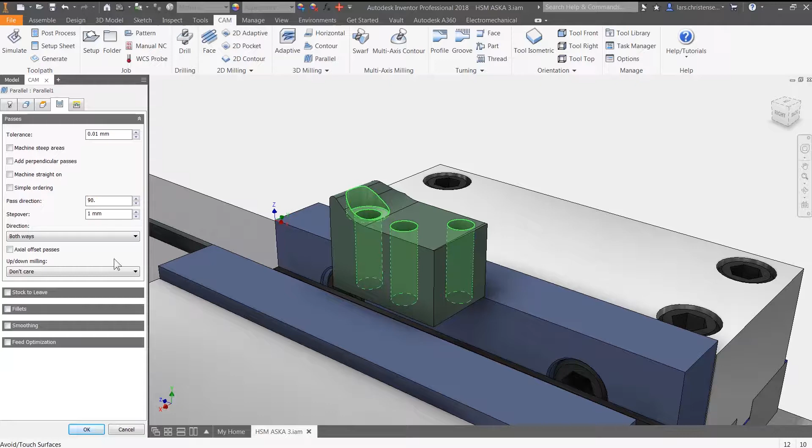Whether you're a CNC programmer looking to see what integrated CAM can offer someone with your experience, or a designer or engineer searching for your complete machining solution, as an Inventor user, you all have one thing in common: you want a professional CAM solution providing you with all the tools you need to work the way you work.

With Inventor HSM, CNC programmers get all the features and flexibility they expect, from toolpath creation to post-processing. Inventor HSM allows Inventor users to create toolpaths for all their 3 and 3+2 work with powerful technology such as 3D adaptive and the industry's most complete package of finishing toolpaths.

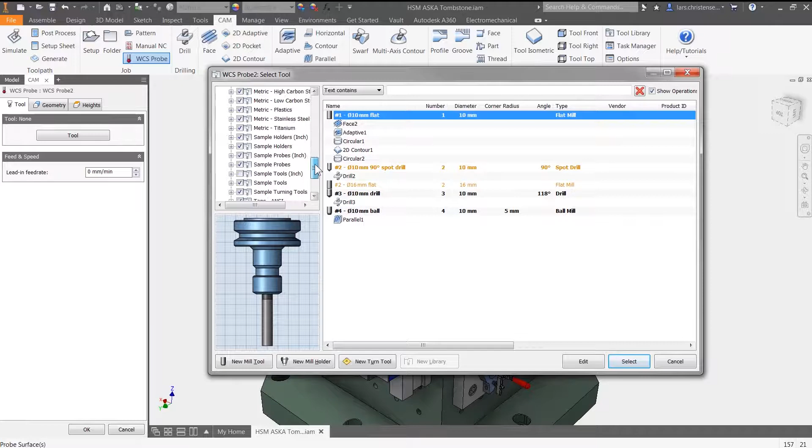Power users will be happy to know that HSM supports rest machining, user customizable tool libraries, and lets you create unlimited machining templates. Bottom line, Inventor HSM lets you manufacture the highest quality of parts in the shortest time possible.

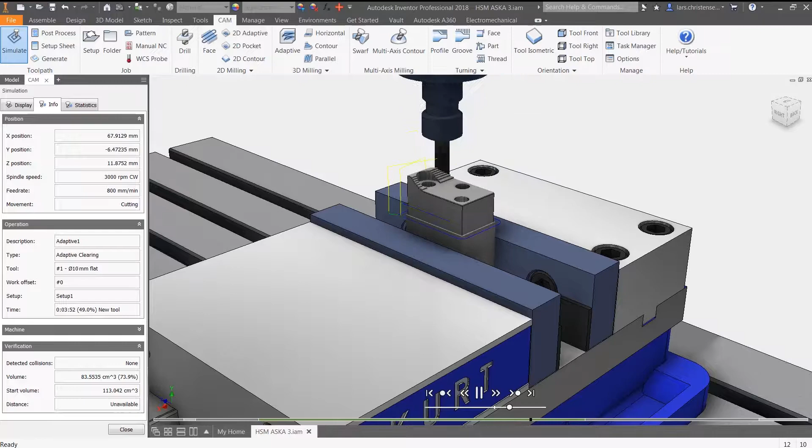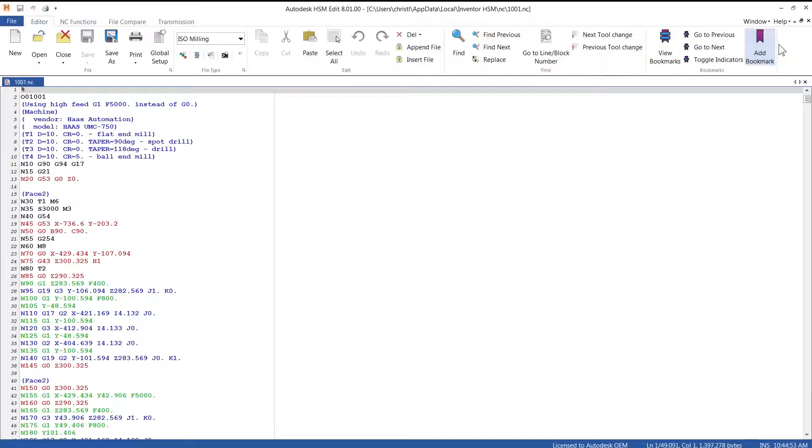Inventor HSM includes a powerful and dynamic toolpath simulation so users can see what they'll be machining long before they post their files. Speaking of posts, Inventor HSM includes a post-processing system including a full library of editable post-processors for the industry's most popular machines.

Inventor HSM also allows you to create graphical HTML setup sheets, including tooling data and toolpath statistics that helps machinists during the setup and machining process.

While CNC programmers appreciate the power and flexibility of Inventor HSM, designers and engineers appreciate the integration, especially the seamless workflow between design and toolpath creation. You never leave Inventor. Simply put, if you know Inventor, you know Inventor HSM.